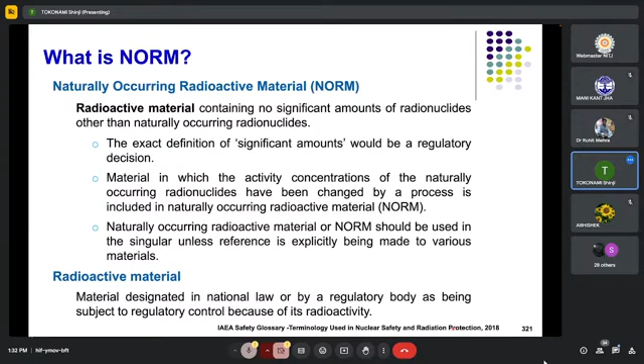Regarding radiological properties, a total of 36 radionuclides are present in the three natural radioactive decay series: uranium-238, uranium-235, and thorium-232.

Analyzing NORM materials requires determining which radionuclides need to be identified and quantified. The focus is primarily on long-lived radionuclides.

Non-radiological aspects: materials may contain acid-forming minerals. The solubility of the host materials should be considered. The tendency of the material to form dust is also significant.

Here is a decay chain of uranium series, thorium series, and actinium series.

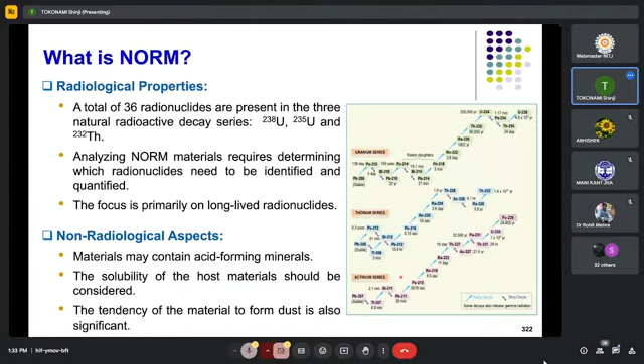Regarding radiological properties, focusing on long-lived alpha emitters, they are uranium series such as uranium-238, uranium-234, thorium-230, radium-226, lead-210, and polonium-210.

Thorium series: thorium-232, radium-228, and thorium-228. Gamma emitters: thallium-208, actinium-228, radium-226, etc., and potassium-40.

Focuses on radon, toron, and their decay products. Characterization depends on the type of material being analyzed.

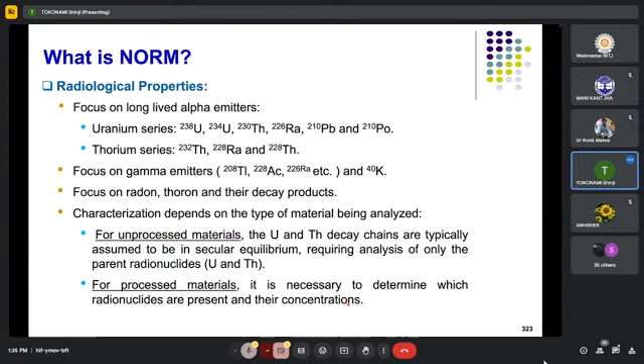Health hazard of norm. The main health risk of norm is cancer, as its ionizing radiation is carcinogenic. Increased exposure raises cancer risk slightly.

Personnel can be exposed to radiation emitted by norm in two primary ways. First, irradiation - exposure occurs when radiation is emitted by materials located outside the body. Second, contamination - due to inhalation or ingestion of material containing radionuclides, such as dust particles, we need to consider this contamination.

All building materials have natural radioactivity. All building materials contain various amounts of natural radioactive nuclides. Materials derived from rock and soil contain mainly natural radionuclides of the uranium-238 and thorium-232 series, and the radioactive isotope potassium-40.

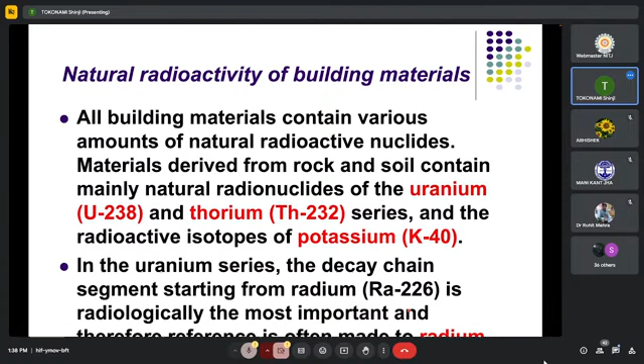Here is a typical and maximal activity concentration in common building materials and industrial byproducts used for building materials in the European Union, EU. Material: most common buildings, typical activity concentration with radium-226, thorium-232, potassium-40, and the maximum activity concentration.

Concrete has 40 becquerel per kilogram for radium-226, 30 becquerel per kilogram for thorium-232, and 400 becquerel per kilogram for potassium-40 as typical values. As maximum activity concentration, in the case of concrete, 240 for radium, 190 for thorium-232, and 1,600 becquerel per kilogram for potassium-40.

Aerated and lightweight concrete: 60 for radium-226, 40 for thorium-232, 430 for potassium-40 as typical values. As maximum activity, 2,600 becquerel per kilogram for radium-226, 190 for thorium-232, 1,600 for potassium-40.

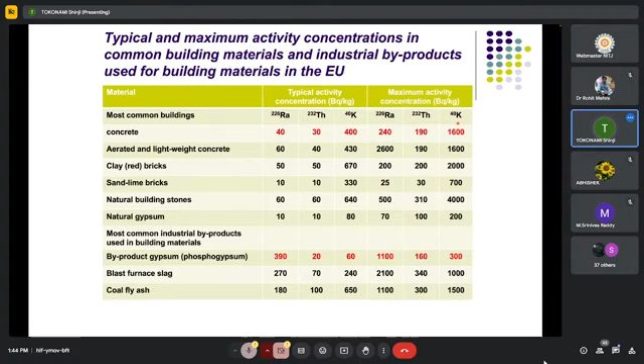Here are examples of the annual effective dose due to external exposure. First, we classified into 4 categories: low activity material, average concrete, upper level of normality, and enhanced concentrations.

In low activity materials, 10 becquerel per kilogram of radium, 10 becquerel per kilogram of thorium-232, 300 becquerel per kilogram of potassium-40. When we calculate the annual excess dose based on structures in a building causing the irradiation—floor, ceiling, and walls, all structures—it contains these radioactivities. The level is less than background dose for floor and walls,

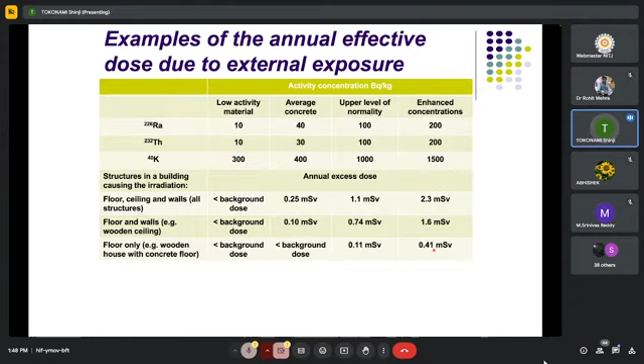Parameters used in calculating the dose. Here is a table for the dose calculation. Dimension of the model room: 4 meters by 5 meters by 2.8 meters.

Thickness and density of the structures, 20 centimeters, 2,350 kilogram per cubic meter. Annual exposure time, 7,000 hours. Dose conversion is given as 0.7 sievert per gray. Background, 50 nanogray per hour.

Specific dose rate in nanogray per hour per becquerel per kilogram. Look at the structure of the inner building causing the irradiation. Floor, ceiling, and walls: 0.92 nanogray per hour, 1.1 nanogray per hour per becquerel per kilogram, like this.

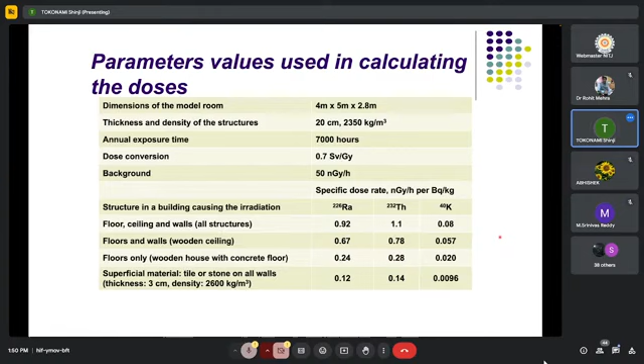I'm talking about building materials and radon. The internal exposure is caused by the inhalation of radon, thoron, and their short-lived progeny. Radon is part of the radioactive decay series of uranium, which is present in building materials. Because radon is an inert gas, it can move rather freely through porous media, such as building materials.

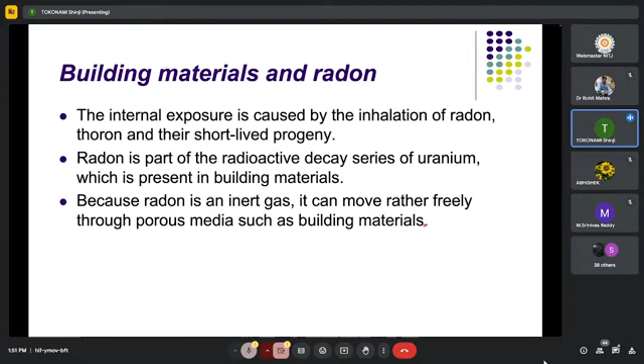The most important source of indoor radon is the underlying soil, but in some cases the building materials may be an important source. In most cases, the main part of indoor radon on the upper floors of a building originates from building materials. Typical excess indoor radon concentration due to building materials is about 10 to 20 becquerel per cubic meter in some regions, and in rare cases it may rise up to greater than 1,000 becquerel per cubic meter.

Okay, wait a moment, I have to change. Sorry. Okay.

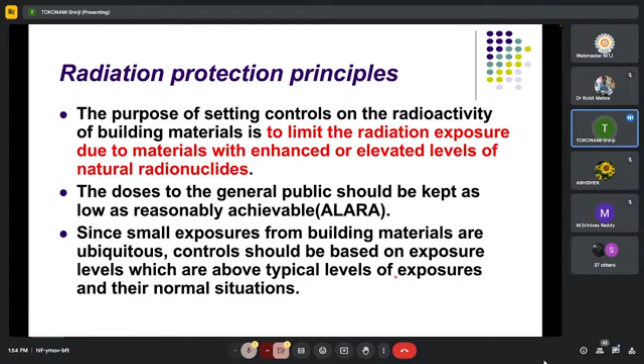Since small exposure from building materials is ubiquitous, controls should be based on exposure levels which are above typical levels of exposures in normal situations.

All buildings contain some natural radioactivity. Small unavoidable exposures need to be exempted from all possible controls. Restricting the use of certain building materials might have significant economical, environmental, or social consequences locally and nationally. Such consequences, together with the national levels of radioactivity in building materials, should be assessed and considered when establishing binding regulations.

The amount of radium in building materials should be restricted at least to a level where it is unlikely that it could be a major source for exceeding the design level for indoor radon introduced in the Commission recommendation, with 200 becquerel per cubic meter.

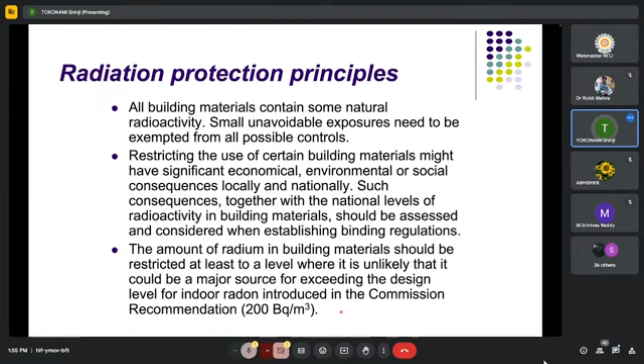Regarding controls on the radioactivity of building materials, based on the following radiological criteria and principles, those criteria for controls should be based on a dose criterion which is established considering overall national circumstances.

Controls can be based on a lower dose criterion if it is judged that this is desirable and will not lead to impractical controls. It is recommended that the controls should be based on a dose in the range of 0.3 to 1 millisievert per year. Note that this is the excess gamma dose to that received outdoors.

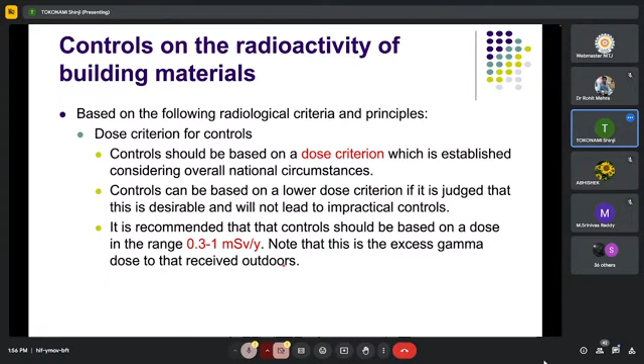As exemption level, building materials should be exempt from all restrictions concerning their radioactivity if the excess gamma radiation originating from them increases the annual effective dose of a member of the public by 0.3 millisievert at the most. Note that this is the excess gamma dose to that received outdoors.

Separate limitation for radon or thoron exhaling from building materials should be considered where previous evaluations show that building materials may be a significant source of indoor radon or thoron.

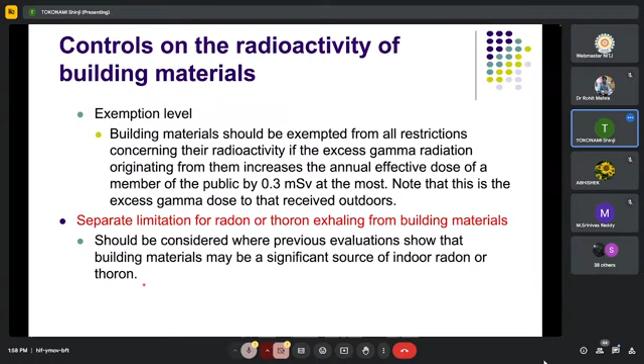Here are the investigation levels for practical monitoring purposes. It is practical to present investigation levels in the form of an activity concentration index. You can see this formula. The activity concentration index should take into account typical ways and amounts in which the material is used in a building.

The following activity concentration index is derived for identifying whether a dose criterion is met. Dose criterion here, materials used in bulk amounts, such as concrete, superficial and other materials with restricted use, such as tiles, boards, etc.

Dose criterion: when the dose criterion is 0.3 millisievert per year, the index is less than 0.5. For a criterion of 1 millisievert per year, the index should be less than 1. In the case of superficial and other materials with restricted use, for 0.3 millisievert per year, the index should be less than 2. For 1 millisievert per year, the index should be less than 6.

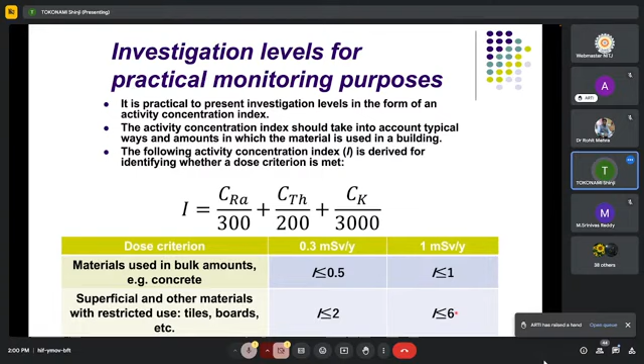How is the index derived? The activity index is derived to indicate whether the annual dose due to the excess external gamma radiation in a building may exceed 1 millisievert.

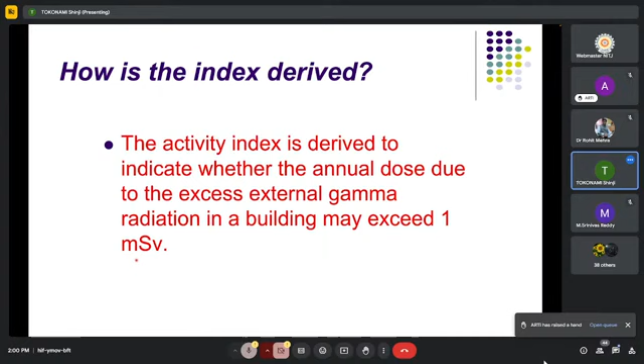The activity index is calculated like this. Factor for radium, dose criterion 1 millisievert per year, equals sievert per 10 to the minus 3. The factor for thorium and radium is calculated; eventually the radium concentration will be 276 becquerel per kilogram, and the rounded value is 300 becquerel per kilogram.

Factor for thorium: criterion 1 millisievert per year, with the thorium-232 concentration calculated here, eventually the thorium concentration will be 231 becquerel per kilogram. The rounded value is 200 becquerel per kilogram.

Here's potassium, calculated in the same manner as the previous two equations. The potassium-40 concentration will be 3,176 becquerel per kilogram, with a rounded value of 3000 becquerel per kilogram.

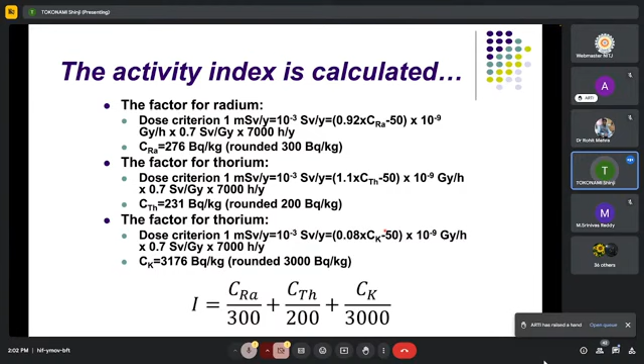So the index can be written like this. Here is 0.92, 1.1, and 0.08, coming from the specific dose rate coefficients.

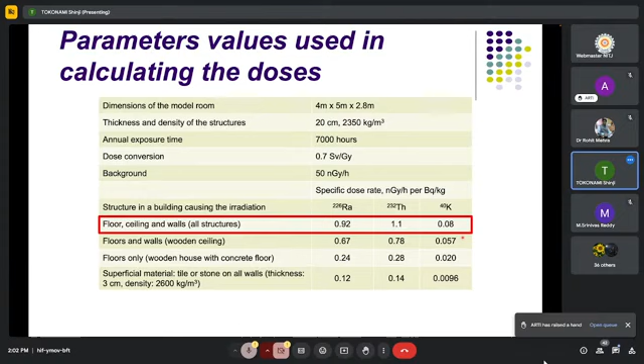Here is important information. The activity concentration index should be used only as a screening tool for identifying materials which might be of concern. Any actual decision on restricting the use of a material should be based on a separate dose assessment. Such assessment should be based on scenarios where the material is used in a typical way for the type of material in question. Scenarios resulting in theoretical, mostly unlikely maximal doses should be avoided.

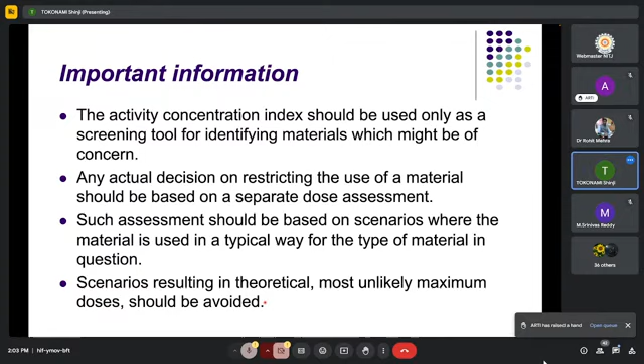Here is a flowchart of the recommended system of control of building materials. First, determine the activity concentration of radionuclides in the building materials. Then determine the activity index. If the index is less than 1 or 6, no restrictions apply.

If not, first assess the dose. If the dose is less than the reference level, namely 1 millisievert, then no restrictions are needed. If not, and the dose is more than the reference level of 1 millisievert, decide on appropriate measures.

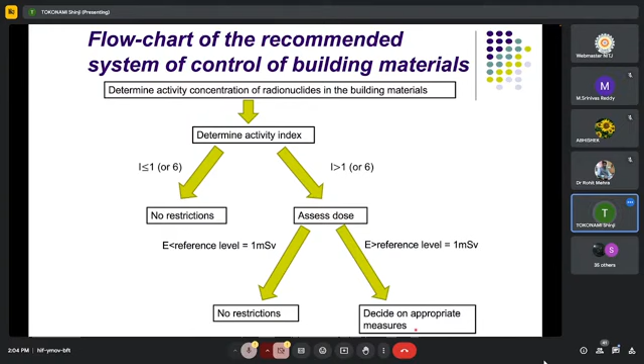This slide shows gamma radiation from building materials in existing buildings. Protective actions may be necessary for existing buildings with high annual effective dose levels caused by gamma radiation due to radionuclides in the building materials.

If considered necessary, the national authority should establish reference levels for exposure to gamma radiation emitted from building materials in existing buildings. Feasible protective measures are not easy to implement. The national authority should consider requiring protective actions to be mandatory for existing buildings of high occupancy where the effective dose levels exceed 100 millisievert. Note that the protective measure carries serious economic penalties and should not be applied without careful consideration.

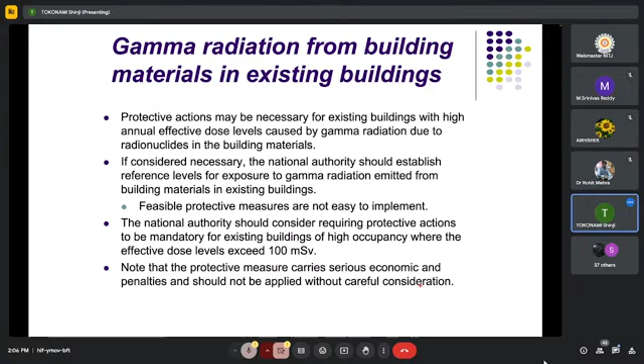Here's the role of building materials as an indoor radon source. How does radon release from building materials? This is a feature of radon. Radon comes from soil and rocks and building materials. Here is an equation of the exhalation rate. This is the diffusion length.

The effective diffusion coefficient is dominated by transport, which is an important parameter for transport of emanated radon, through radium decay, emanation, diffusion, and exhalation from surface to the atmosphere.

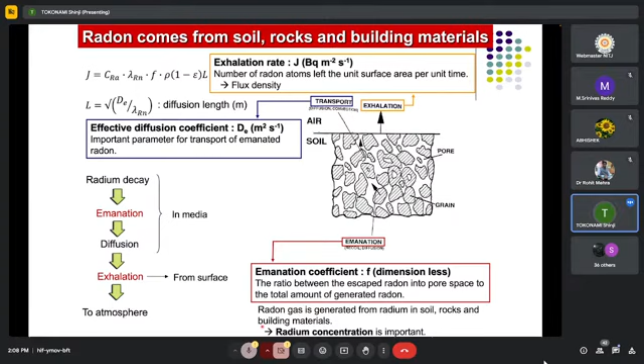The emanation coefficient, F, is dimensionless. It is the ratio between the escaped radon into pore space and the total amount of generated radon. Radon is generated from radium in soil, rocks, and building materials, so radium concentration is important.

Here's the equation, reported in UNSCEAR 2000, for the radon exhalation rate from the soil surface, written by this equation.

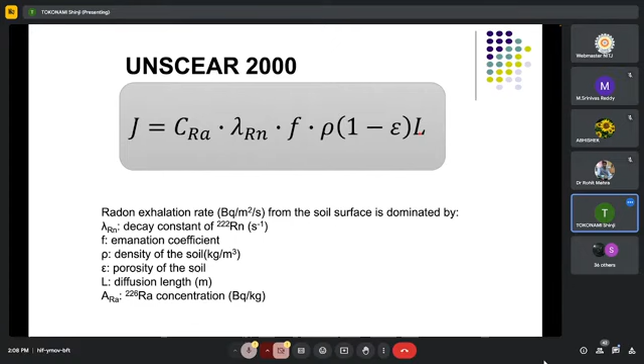Radium-226 concentration, decay constant of radon-222, emanation coefficient, density of the soil, porosity of the soil, and diffusion length are important parameters to determine the exhalation rate.

This table shows different materials and their emanation coefficient and diffusion length. For concrete, 0.1 to 0.4 is the emanation coefficient, and 0.06 to 0.2 is the diffusion length.

For brick, 0.02 to 0.1 emanation coefficient, diffusion length 0.2 to 0.4. Gypsum, 0.03 to 0.2 emanation coefficient, and 0.8 to 1.3 as diffusion length.

Cement: the emanation coefficient is quite small compared to the other three, especially compared to concrete. Cement is 0.02 to 0.05, with no data on diffusion length. Fly ash is also much smaller than others.

This is a typical exhalation rate from various building materials. In the case of concrete, 2 to 30 becquerel per square meter per hour, the surface radon exhalation rate.

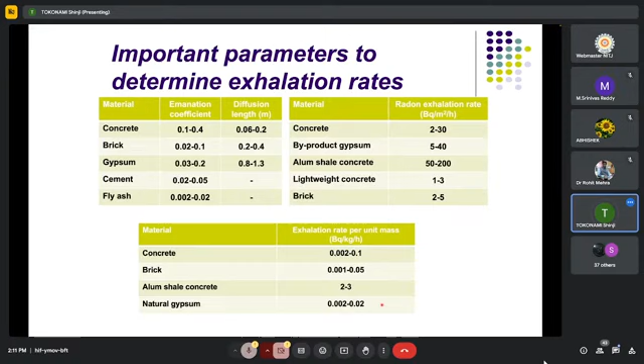This slide describes the contribution to indoor radon concentration from different building materials, using this formula: C is radon concentration, E is exhalation rate per unit area (surface exhalation rate), S is exhaling area, V is room volume, and lambda V is the air exchange rate, or ventilation rate of the room.

Here are the various materials. For concrete, we assume an exhalation rate of 10 becquerel per square meter per hour. The maximum radon concentration will be 40 becquerel per cubic meter, with a realistic value of 20.

For lightweight concrete, when we assume an exhalation rate of 2, the radon concentration will be 7 as maximum, 4 as realistic value.

For alum shale concrete, if we assume an exhalation rate of 200 becquerel per square meter per hour, the radon concentration goes up to 700 becquerel per cubic meter, with a realistic value of 400 becquerel per cubic meter.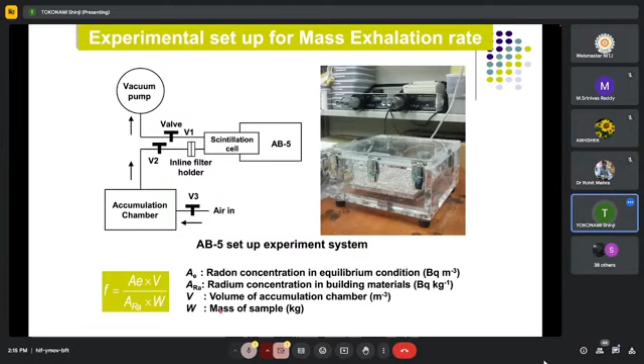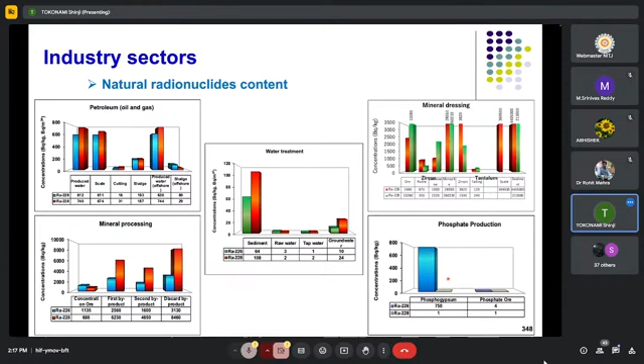Oil and natural gas production: during the extraction of oil and natural gas, natural radionuclides from underground formations are brought to the surface. Elevated activity of radium present in NORM is often released by the oil and gas industry, particularly in production waters.

During the extraction process, radium is co-precipitated along with barium and strontium. A portion of the radium is deposited during the scale formation process, and another portion is discharged to the sea with effluents.

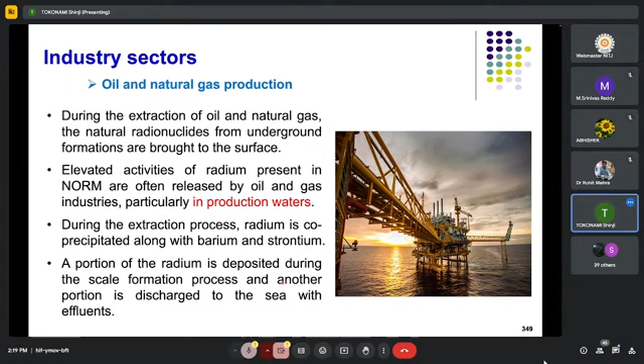The most important radionuclides in scales and other precipitates are the isotopes of radium, with specific activity ranging from 100 to 1,000 becquerel per kilogram. Concentrations of lead-210 and polonium-210 in sludge and scales can vary between 20 and 1,000 becquerel per kilogram.

The disposal of scale from oil extraction industry installations and of sludge containing NORM can be of environmental significance, with contamination of land being the major concern. For example, the average radium concentrations in soils sampled at an oil field contaminated with NORM in eastern Kentucky, United States, were 32,560 becquerel per kilogram.

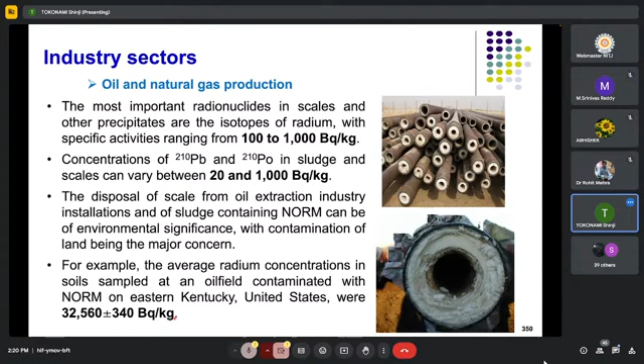Bauxite and aluminum industry. Bauxite is used to produce alumina, which is then used to produce aluminum. Waste can be generated at several points in the production process. Bauxite ores sometimes contain elevated concentrations of natural uranium and thorium. Volume is reduced by half, but the majority of radionuclides report to mud, which contains radionuclide concentrations above background levels. Internationally, only about 2 to 3% of bauxite residuals are reused in a productive way.

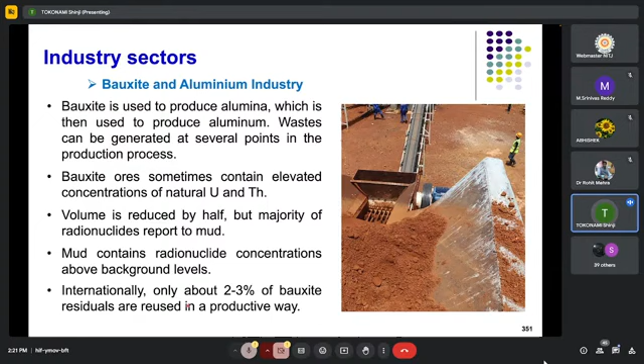Phosphate industry. Phosphate rock is used extensively, firstly as a source of phosphorus for fertilizers, and secondly for making phosphoric acid and gypsum. Ores typically contain about 1,500 becquerel per kilogram of uranium and radium. The fertilizers become somewhat enriched in uranium, up to 150% relative to the ore, while 80% of radium, 30% of thorium-232, and 5% of uranium are left in the phosphogypsum.

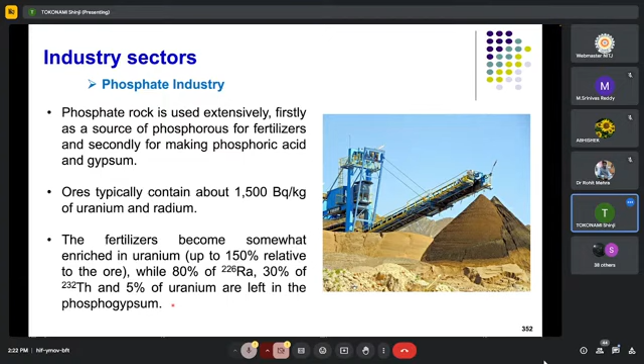Phosphate industry. The use of phosphate fertilizers in agriculture and of gypsum in building materials is a further source of possible exposure of the public. Elevated radon exposure of the public can further be expected in sites being developed for housing.

The slag, which contains radium-226 concentrations ranging from 750 to 1,100 becquerel per kilogram, has been used as building material in the United States, especially in communities in southeast Idaho.

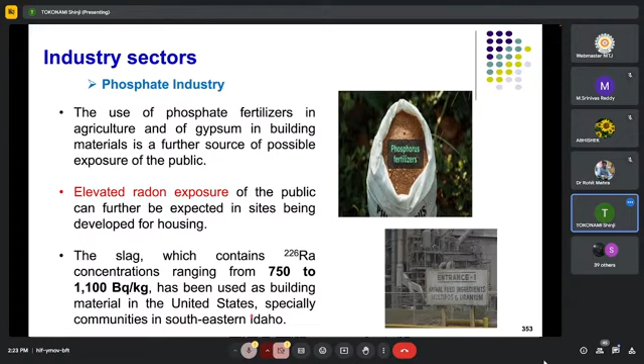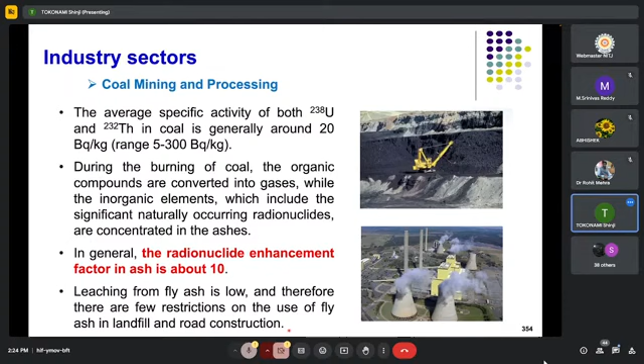In general, the radionuclide enhancement factor in ash is about 10. Leaching from fly ash is low, and therefore there are few restrictions on the use of fly ash in landfill and road construction. However, the use of fly ash for building construction results in radiation exposure from both direct irradiation and radon exhalation. Dumping fly ash may increase the radiation level around the dump site.

The most significant exposure pathways are ingestion and inhalation of the isotopes lead-210 and polonium-210.

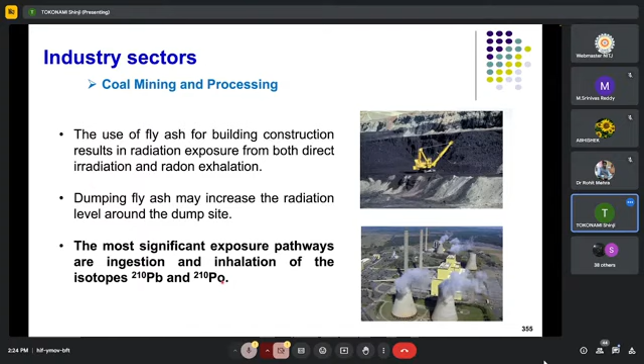Building industry: extensive use of NORM residues: fly ash produced in large quantities from coal burning, slags of steel works and metal recycling industries, phosphogypsum, and red mud of the aluminum processing industry.

Again, extensive use of NORM residues: fly ash produced in large quantities from coal burning, slags of steel works and metal recycling industries, phosphogypsum, and red mud of the aluminum processing industry. These materials are a source of gamma radiation. Radon exhalation is also a potential source of exposure. In such exposure scenarios, longer times are necessary.

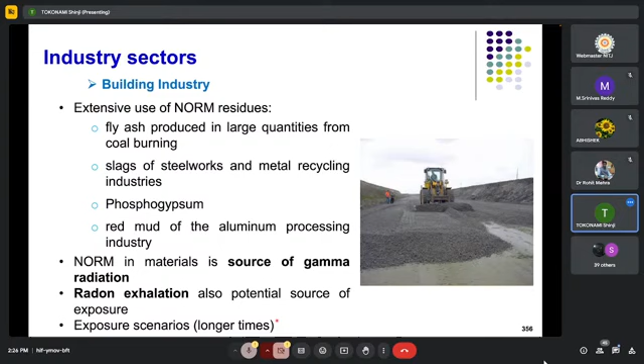Rare earth and titanium oxide industries. Lanthanoid rare earth metals comprise 16 elements. Bastnaesite and monazite are the most important minerals containing rare earth metals.

Activity concentration of bastnaesite: 900 to 1,200 becquerel per kilogram for the uranium-238 decay series, and 700 to 7,000 becquerel per kilogram for the thorium-232 decay series.

Activity concentration of monazite is much higher: 10,000 to 50,000 becquerel per kilogram for the uranium decay series, and 5,000 to 350,000 becquerel per kilogram for the thorium-232 decay series.

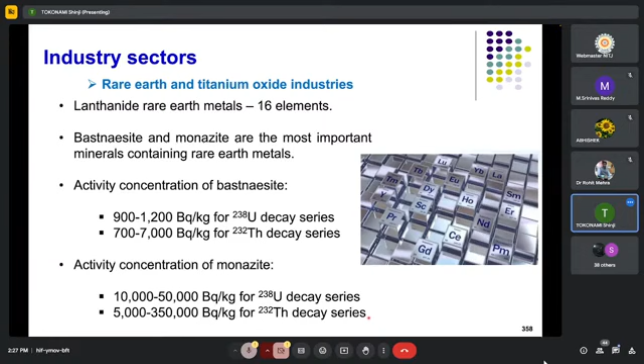Rare earth and titanium oxide industries. Activity concentration of titanium ore: 300 to 600 becquerel per kilogram for the uranium-238 series, and 35 to 600 becquerel per kilogram for the thorium-232 decay series.

For titanium production, specific activities of radium sulfate precipitates in pigments or scales may be as high as 400,000 becquerel per kilogram, and thorium-228 levels may be higher than 1 times 10 to the 6 becquerel per kilogram.

Exposure pathways include external irradiation and migration of radionuclides from landfill.

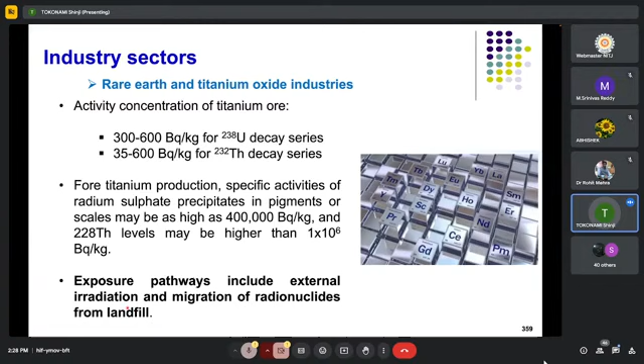Here is an example of measurements at a rare earth extraction plant in Thailand. We conducted this measurement at the rare earth extraction plant. A high gamma dose rate was observed at the Department of Waste Management, with a value of 6.3 microgray per hour. The average gamma dose rate was 0.43 microgray per hour, while the average gamma dose rate nearby the plant, around the plant area, was at a normal level of 22 nanogray per hour.

High radon and thoron concentrations were observed: radon levels more than 400 becquerel per cubic meter, and thoron concentration more than 5,000 becquerel per cubic meter.

Professor Mehra, may I have a short break? Hello, hello, may I have a short break? Sir, I am not able to hear you. Excuse me? Yes, sir, yeah.